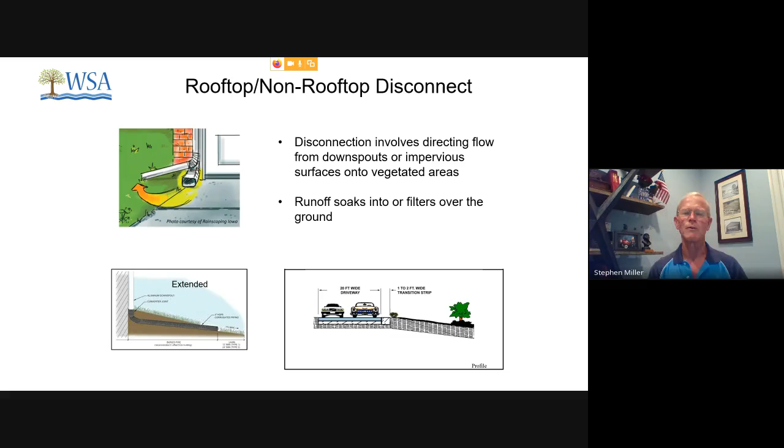And so you need to know, again, in your rules and regulations, in your declarations, who's actually got responsibility for maintaining these. And these systems, of course, will fail if the gutters aren't kept clean, because you're going to end up having debris go down and it will get into these narrower pipes where the water outflows into the yard, and it'll get clogged. So maintaining clean gutters is definitely something that you want to do.

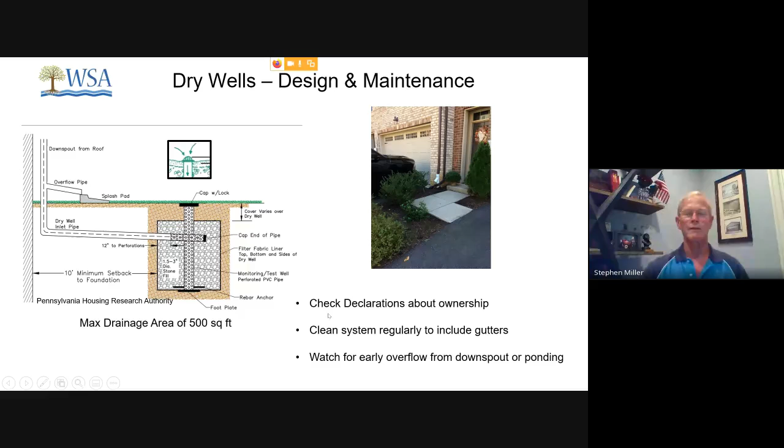Once again, just like all the other BMPs that I'm talking about, this is on that inspection checklist when the inspectors come out from inspections and permits.

And as the water goes across this, it slows down and it begins to infiltrate and then get cleaned as it goes through all that gravel to eventually helping to replenish the groundwater. And then after that, it continues on its way, continuing to get filtered by the turf until it makes its way down to the stream below.

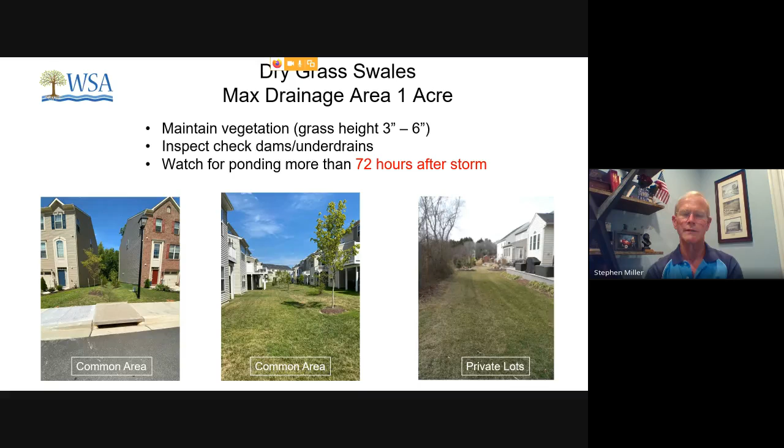If you start seeing ponding that lasts for more than 72 hours, you've got an issue. And probably what's happened is you've had sediment that's been flowing into that swale. We've seen it out here. I have it behind my property. Every time the landscapers come out and they use their mowing equipment behind my yard, just from development that kept occurring upstream of my home, you know, when the community was being built, some of that sediment came down into my yard. It's leveled out my swale a little bit, and I'm eventually going to have to go in there and regrade that area to allow the water to flow through there and not pond.

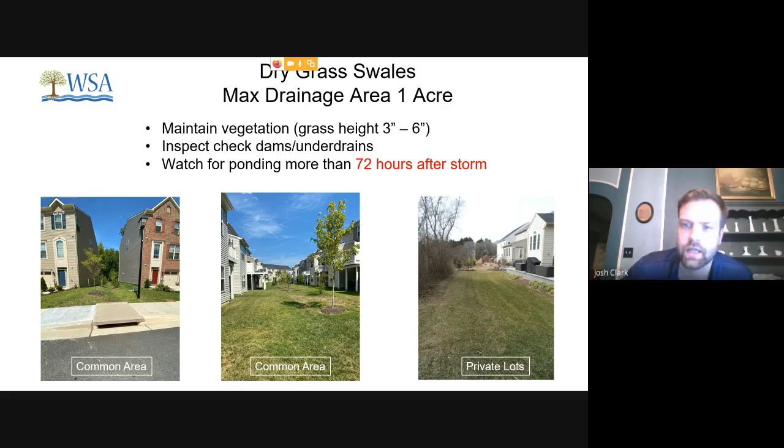Steve, we just got a question from Renee about the sheet flow into a conservation area. Yeah. She asks, why not plant these areas of sheet flow and or in the gravel area? It looks way too much like a walking path. You're right. I mean, I agree. And that surprises me. Now, let me say something here. This one is kind of unusual.

That might be an indication to somebody that this is a BMP, but this is just a homeowner education issue because this is the way it was designed, and I wouldn't spend a lot of time modifying it.

Okay, so here's one community, and you can see on the left-hand side a swale that does not have a lot of turf in it. You can also see, because it's got the same kind of device as this slide does, the water just comes straight off the street. So look at all the debris that came off the street into this particular swale.

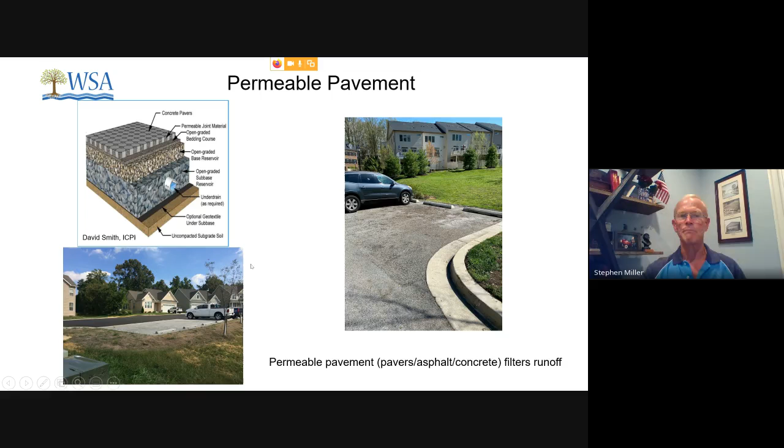I've been all over different websites. Some of them say do it as many as 4 times a year. Others say once a year. I think that it really, again, depends upon your environment, how clean the stormwater runoff is on your particular pavement.

And one of the things you have to be careful about, and we've only had one contractor that ever did this, but make sure they're not going to use sand during the wintertime, because sand will definitely challenge the operation of this system.

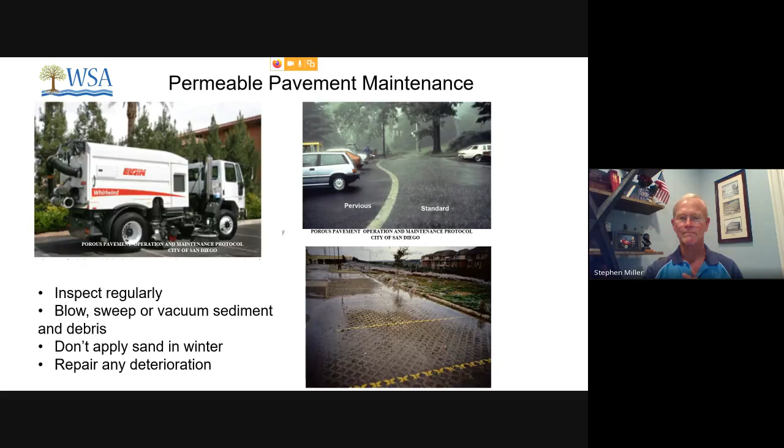And the one thing that you need to ensure, and we talked a lot about this yesterday with the stormwater management plan, is who actually owns these. Is it your community? Is it publicly maintained by the county? And in some cases, are you potentially sharing your system with somebody else? Another nearby neighborhood, and you have joint responsibilities for maintenance, or at least the expenses of it.

One of the things that was, again, a surprise to us was to see in our declarations that if any part of the area of our community that's dedicated to a public or governmental entity fails to properly maintain that area, then the HOA has a responsibility to take care of the issue. We have to budget for it. And part of this, I'm sure, is to ensure that we maintain property values.

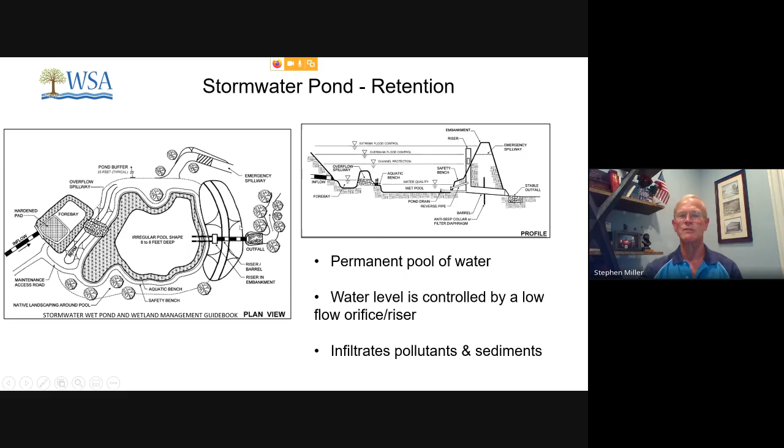So what happens is excess water that flows out of the stormwater pond goes down these series of little ponds. And then in between these ponds are these stone riffles. And the water will go into this pond. Some of the pollution and everything will start settling out down to the bottom. It goes across these, again, stone riffles. And these normally in summertime are vegetated.

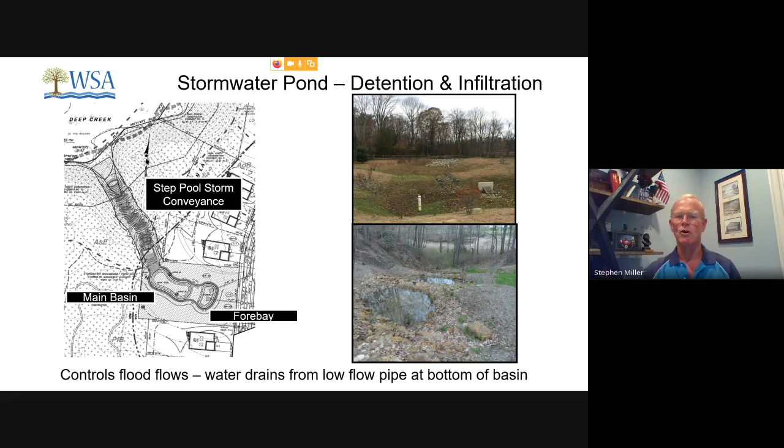So it's also going through some vegetation down to the next pool, and then finally on its way out there to Deep Creek. And so it leaves in a much more controlled fashion. It's not going to cause all of that terrible gouging that you had before in various stream beds, and also just simply ravines that were going down to the different streams. And this is what's helping to prevent all that sedimentation that you were having in the different creeks around you.

So here's an example of the same device before a storm. And then here's during a pretty heavy storm. It's filled up the forebay, and it's also filled up the main basin. And the excess water is exiting out through the low flow pipe. And this is the low flow pipe. I mean, when you're there, it looks like it's coming out like a fire hose.

And these different ponds that were empty before start filling up, and you can see it goes down in a nice controlled fashion through a series of rocks into a pond, and then it just keeps making its way down eventually into the stream. And I'll tell you, it's really kind of neat when you go out there during a storm, once where there wasn't water, there is, and it is just like being in nature and not watching this deluge of stormwater runoff racing down to the stream. I think they're pretty neat.

And then 48 hours or 72 hours later, whatever's in your stormwater management plan, this is what it looks like again. So I'm going to now switch, and I'm going to talk about maintenance on these stormwater ponds.

And I'm sorry, Josh, do you have a question? Yep, we got a question come through. How big of an outfall of water does this detention pond flowing to a conveyance have versus a standard detention only pond? How much is the flow of water out of that? I believe that's what the question is, yeah.

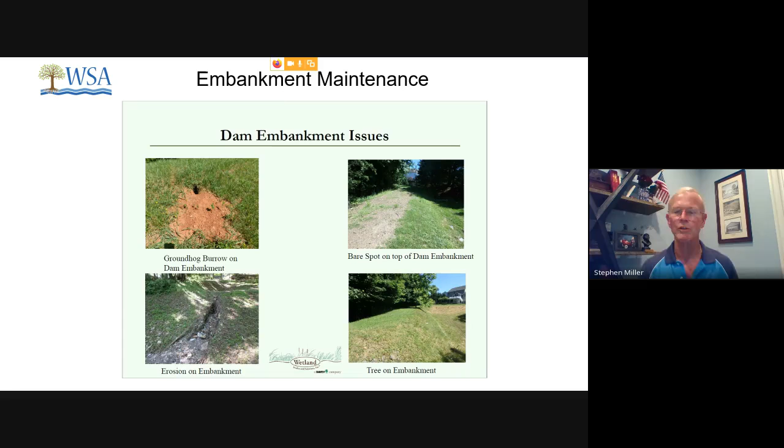And definitely don't put any plants on the top of these embankments or on the sides. All of those things are going to weaken the integrity of that particular device, that particular feature of your stormwater pond.

And over a period of time, you're actually decreasing the amount of stormwater runoff that can actually be contained within that particular area. I've seen anywhere from when it hits 50% to where it hits around 2/3 of the volume of that particular forebay, that you then have to do some removal of that sediment that's been collected down there at the bottom.

And I'm going to talk a little bit more about this, but I'll say it again. This sediment is going to obviously be nasty stuff. It's been coming off the roads. It contains fertilizer. It contains other nutrients from other things that have been put into the storm drain systems. It is hazardous material that has to be treated as such. And it will require somebody to come out, not only remove it, but they have to have the right place to dispose of it. It's not going to be in those woods behind that particular forebay.

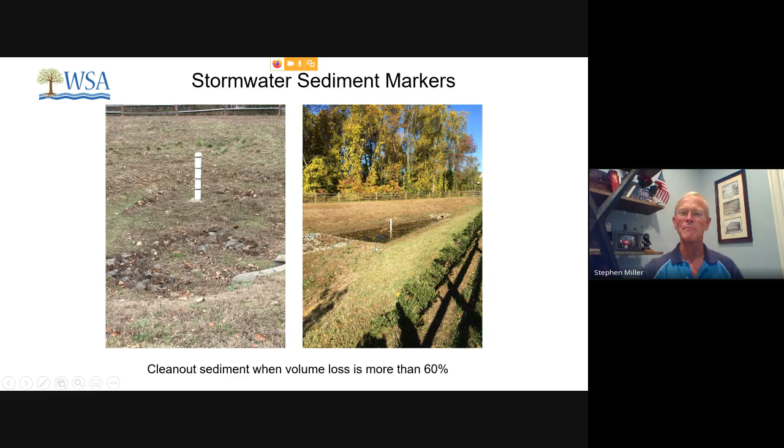And at this particular time of year during the late fall, it's sucking up any leaves or other debris that you've got there within your stormwater device. We call the county, they come out and they take care of removing that debris. But if it's private, you need to pay the same attention to it and make sure that that trash grate stays clear. And I put down on here after major storm events, about every 2 inches. I think that's probably a good rule of thumb to go out and take a look again at all your different devices.

Anybody who has a stormwater management pond that retains water all year long is probably going to have problems with this algae growth during the summertime. The way that you manage this is by working with your landscaper and trying to use green principles as much as possible with the fertilizers that you put onto the lawns. You try and make sure that whatever fertilizer ends up on driveways or sidewalks gets blown back into the yards so that hopefully it ends up going into the ground and not into the stormwater drainage system.

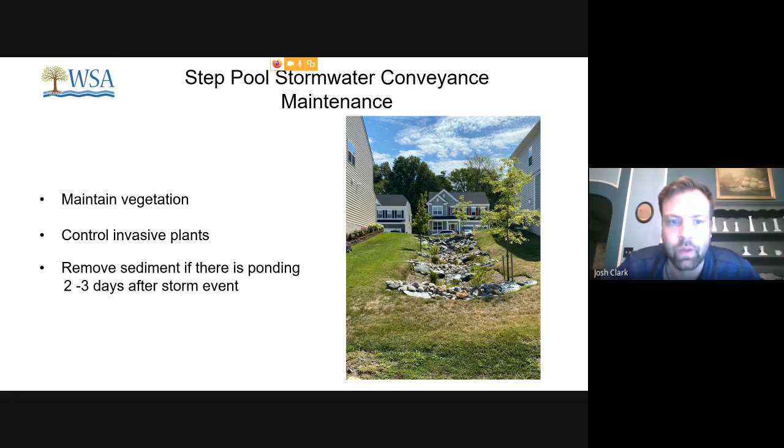Steve, point of order, we just got a question from Michael. What do you mean when you say the example has not been accepted yet? The example has not been accepted yet. Did I say that? Yeah, so I think you were saying that this is a new community. The community has not been accepted yet. It means that the developer's not finished yet with everything, that the as-builts haven't been turned in, and that the grading permit is still active. Does that make sense? That is the right answer.

Okay, so if you end up having problems, or you think you have issues with any of the county maintained systems, this is really a pretty neat way to bring that to their attention. It's sometimes called fix. I must have it on here someplace. I do in my notes. I'll come back to that here in just a second. But it's a 311 app. Go on Google, Anne Arundel County 311, and it will take you to this particular website.

And you do have to register. You can be registered as a guest. And then what this thing allows you to do is choose from a variety of menus, whatever your particular problem is. And this problem was a drainage problem. And I went ahead and I described exactly what the problem was, that one of our low flow pipes didn't appear to be working right. And then the neat thing is you can actually attach an attachment on there.

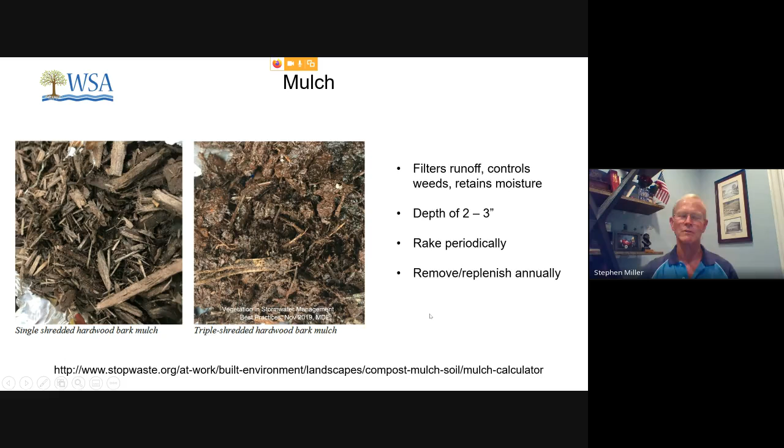It doesn't include labor and stuff, but you at least have a starting point to see if the bid that they give you is reasonable.

And then finally, there are really some neat apps out there. I'm just pointing out one of them. But if you go to suncalc.org, this is an app that allows you to position the sun at any time of day, any place in the world, 365 days a year. And you can also change the elevation of whatever point you designate on here.

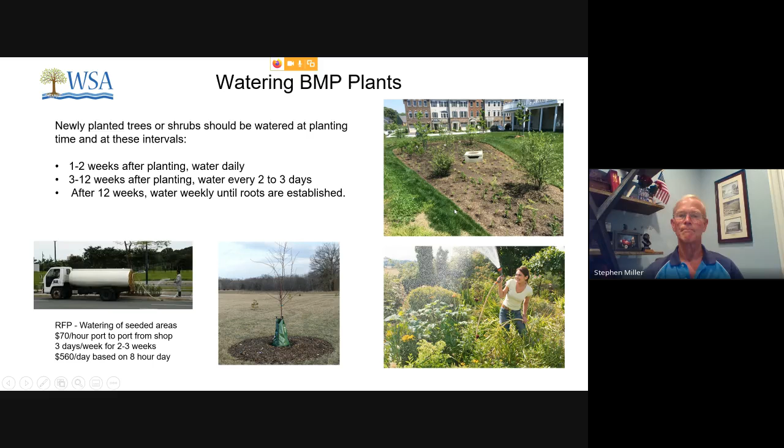So I don't have an answer for you on this. I've told you what our issues have been with this, but I would choose wisely when it is that you plant. And we found waiting until the end of the year has been the option that has worked the best for us in terms of overall plant survivability. And I am not a master gardener. I'm sure that there's some of you out there who are, and you would have better ideas than what I just suggested.

I would say that this is not unusual to see a BMP looking like this. It's sometimes going to look like this, where it's got lots of weeds, particularly in the summertime, particularly this summer where we had a lot of rain. And as long as this isn't invasive, and this is grass, crabgrass, you can probably let it go. But again, it's back to the aesthetic value of these BMPs.

When they're in somebody's backyard or they're right prominent in a common area, you may choose, like we do, to have these things mechanically removed on a monthly basis, and make the garden look just like what you'd expect it to look in your front yard if you cared about your plants and appearance.

We do, though, use integrated pest management strategies. We just don't automatically have them come out on a schedule to spray for pests or any other disease that we might see on the plants. As soon as we see some indication of it, then we call the folks to come out, take a look at it, and decide what the best treatment is for it.

And then your cleaning goes late into the season because the leaves are going to fall off, and it just seems like the BMPs are a natural collection point for all the leaves. They go underneath all of the different plants that you have out there. You've got to get them out. And if you don't, then they will go into your storm drains, collect in your catch basins, and maybe some of them will make it out into your stormwater management ponds or whatever outflow devices you have within your community. And then you've got to clean it out from there.

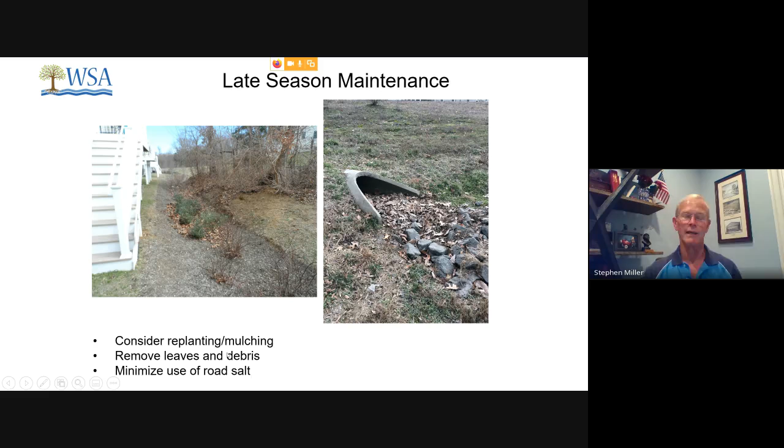One thing that I would strongly recommend is, in addition to not using any sand, particularly if you've got those pervious surfaces there from your parking areas, don't use road salt, particularly in those communities where the water is going right off the road directly into the BMP, because that road salt is going to end up killing your plants.

And so what are all of these white pipes that are sticking up? Those are observation wells. They look down into that 4-6-inch perforated pipe that you have down below your bioretention areas and maybe bioswales. And you take a look down into those 48 hours after a storm or so, and it should look like this. You don't want to see debris down there. You don't want to see it filled up with water.

If it's filled up with water, that's not good, because that means that the water is not exiting the BMP through that perforated pipe down there like it should. And it's probably your first indication that you may have some clogging issues. You're going to have to get them cleaned out, or you're going to have a growing problem because you'll have continued backup within that system.

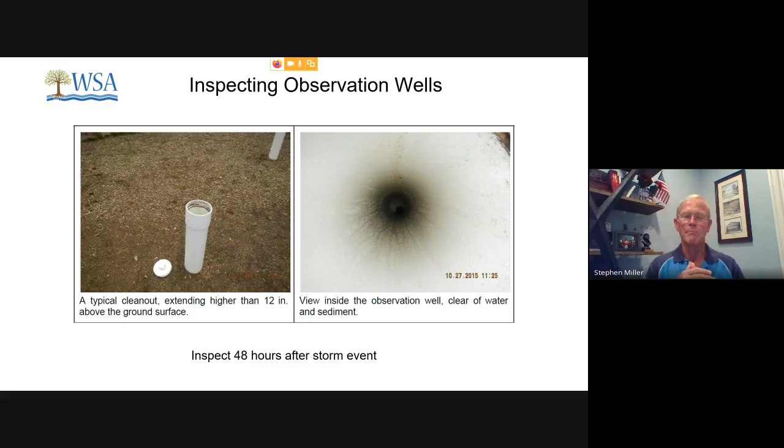I would not have thought about this, but you probably do a soil analysis on your turf around your community. You're sure that you do it on your own lawns, and you determine whether or not the pH is out of balance, and then you correct it to make sure that your plants and your turf go the way that they should. We have not done this within our BMPs, but I'm going to do it because we just contracted to do it for our common area turf, and then said, well, shoot, we've got some plants that aren't looking all that great within our BMPs. Maybe we should also test the soil in there.

Recommendation is you do it about every 3 years. And then you probably need to make sure that it's not going to rain when you have the treatment done. And maybe the treatment is not all done at one time, depending upon just how out of balance you are with your pH. Make sure you've got a good firm doing this with a soil analysis and also the right folks that are going to treat it. And then if you need to, consider fertilizing.

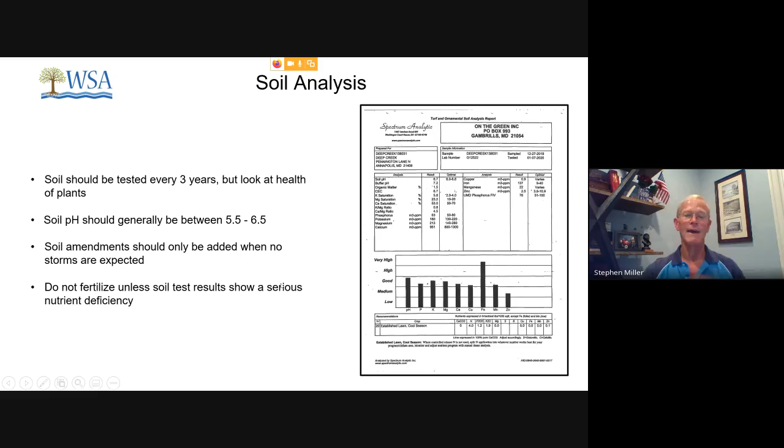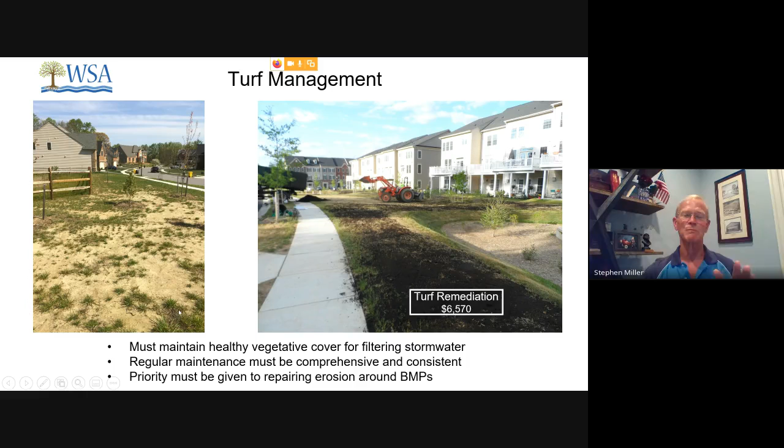And so in this one project, we spent almost $6,600. Maybe it doesn't sound like a big deal for some of the larger communities, but for us, that's a fairly big dent out of our budget. And that's just for that one remediation project. That doesn't include what we're already paying to maintain the BMPs throughout the year. So you have to budget for that. And you got to be persistent, because not all this grass is going to grow up. It depends upon the weather conditions, and you got to have a backup plan.

You don't take your grass clippings and toss them into the BMP. You don't have somebody do landscape work at your house and take any of the excess dirt from that project and then dump it into the BMP. We've had all that. I'm sure some of you have had that in your areas as well. They are not places to dispose material in. And so your landscapers also need to know that they don't run their big equipment through that area either and cause issues with rutting or any of that other kind of stuff that would affect performance.

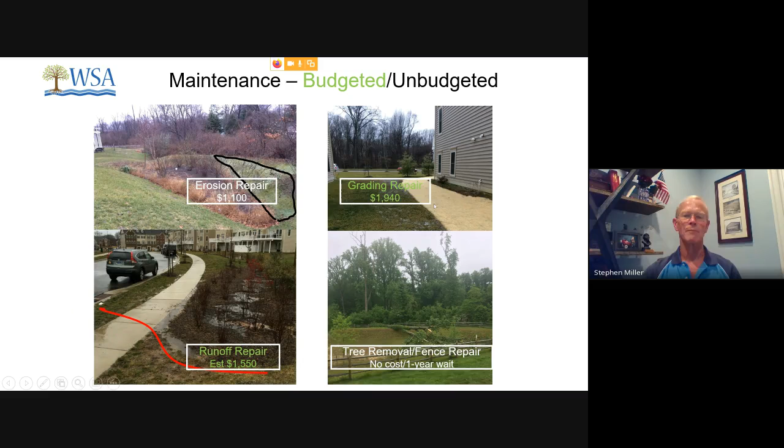For this particular project, to fix water that's bypassing the stormwater management facility, $1,550 was the estimate. To do some grading repair work where we had ponding, about $2,000. And we went to the county because we wanted to fix this problem here. The water is bypassing the device, going across the sidewalk into the street. In the wintertime, this freezes, becomes a safety hazard. This is a very public sidewalk.

This is what the engineering diagram looks like in our stormwater management plan. Our landscaper, who we've been working with a long time, came up with this cartoon drawing of what the proposed fixes for this were. And it really was not very difficult. I mean, it was to basically rechannel the water in the middle using some river rock and make sure it flowed down the BMP the way that it was supposed to.

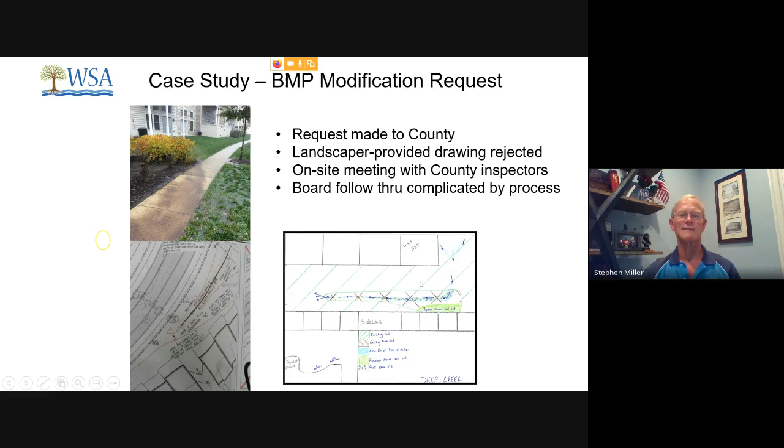This was not an acceptable diagram to the county. We had an on-site meeting with county inspectors. They suggested some changes that we might make to get it through the process. Not that we've lost interest in it, but the board's only got so much energy and there's other new problems popping up. It's still on our list of to-dos, but that money was swallowed up some time ago by other needs. So we'll come back and we'll eventually fix this. But you'd think it's a minor problem, easy fix, not always.